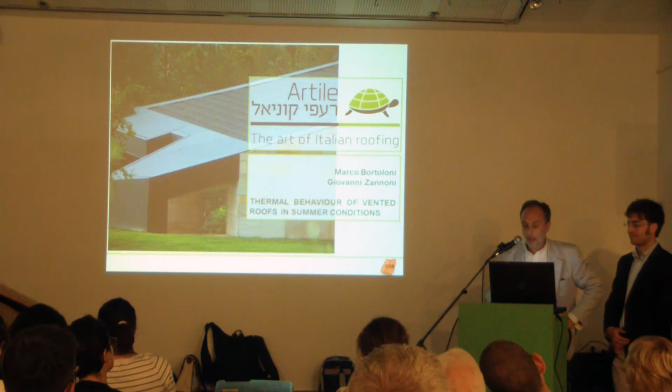As you have heard, the roof is something like an energetic barrier. It has to face several problems during the year: the problem of the cold in winter, the problem of the heat in summer, and managing the passage of vapor all year long. So it's one of the most important elements of the building envelope, and it must be designed in a very good way to get the best performance it can.

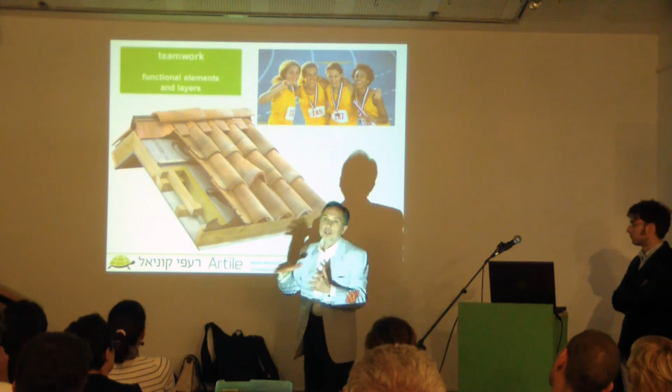As Dr. Gagari told you, the design of the entire roof is made up of several elements and layers, and you have to design them like a teamwork. They have to work together. You have to manage all the different layers and overlap every one, thinking exactly about what you need and what they have to do.

And you've seen in the last slide of Dr. Gagari the different problems that come out with the different components of the roof package. So it's something, I used to say, like a teamwork that must work together.

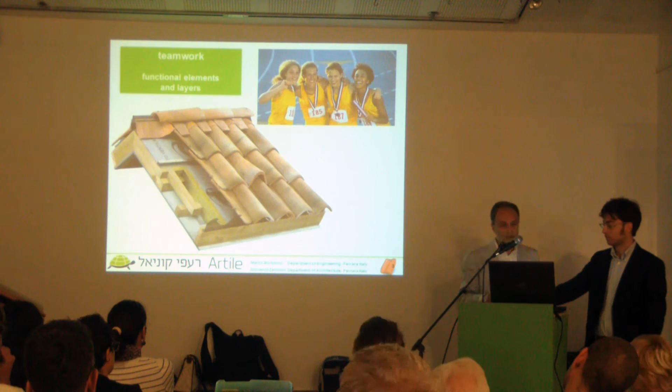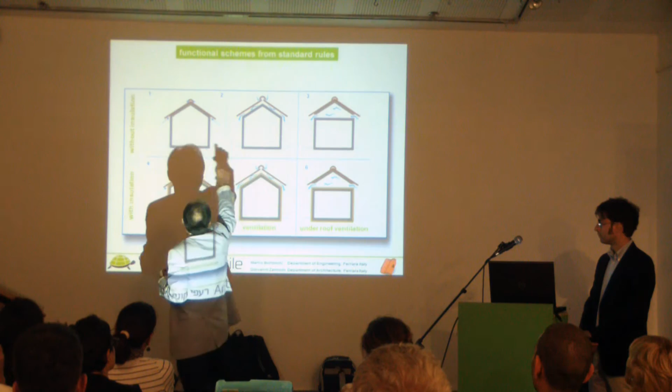From the sustainability point of view, the comfort point of view, the energy saving point of view, the Italian standard rule, I mean the European standard rule, because they are the same, planned 6 solutions, 6 functional schemes. The upper line without insulation, some solutions without insulation, and the lower 3 with insulation.

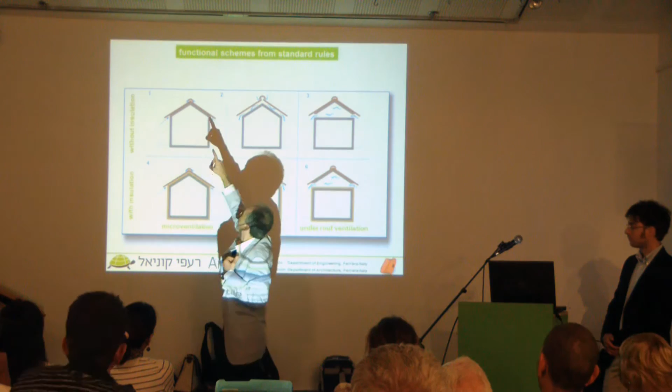But all 6 always have a ventilation layer that could be thin, around 3-4 centimeters, that we call micro ventilation. There could be more space, a larger ventilation layer to increase the movement of the air. In literature they call it above sheeting ventilation or full ventilation.

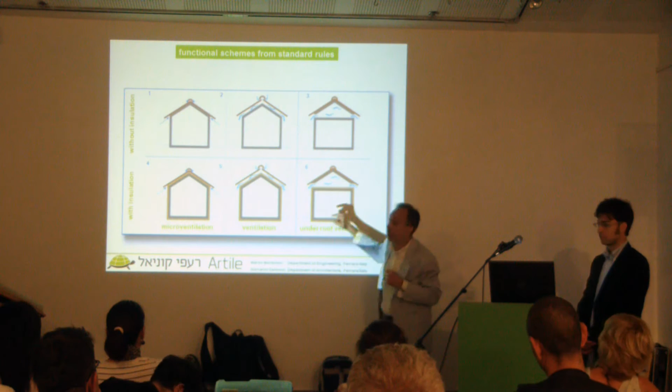And the third solution that you find in both lines is something like a ventilation space through the attic, the space under the roof. These are the 6 situations that you can find in the Italian standard, the European standard rule.

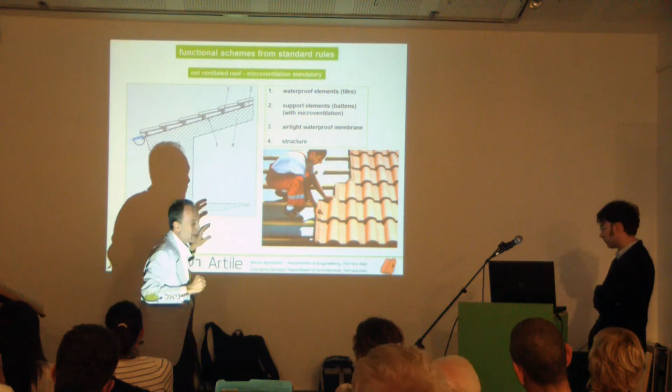And just to let you understand better, I can show this picture that also comes from the standard I was telling you about. This is the minimum required by the standard rule. That is a microventilation that comes out laying the tile over a single line of battens of 3-4 centimeters. And in the European standard, this is mandatory. You must always realize at least this situation because it solves a lot of problems.

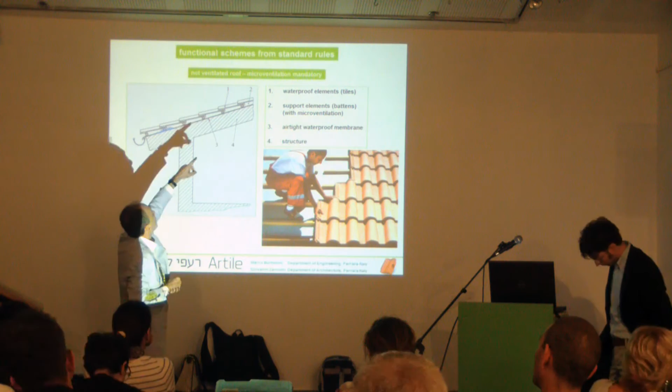And you see, you can have a structure, light or heavy, a massive concrete structure or a wooden structure, with the battens and tiles, and between the curved part of the tile and the battens, you realize an immaterial space, an immaterial function that is the microventilation I was telling you about.

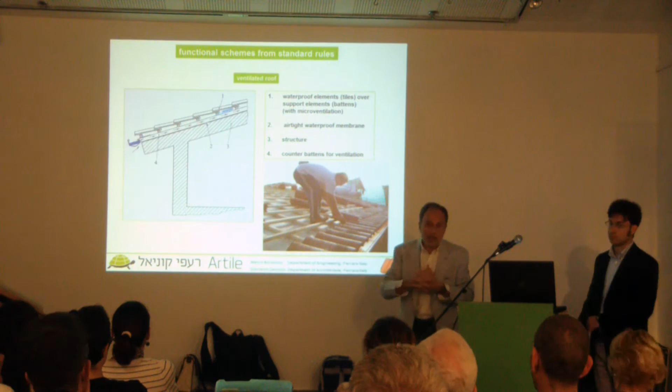To increase the performance of the movement of this air, you can use a double batten with a single line.

Oh, thank you, but I can use the shadow. Like a Chinese shadow. Something else?

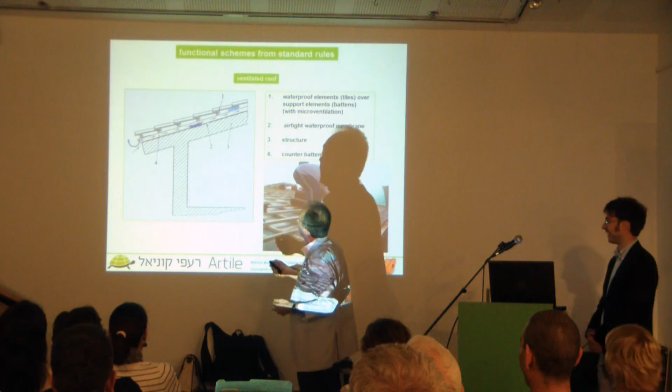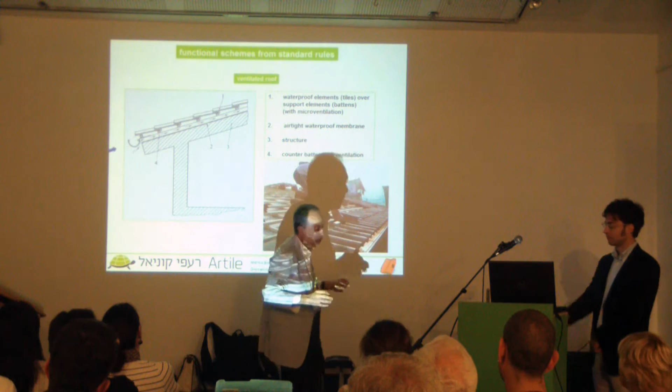Okay, a single line perpendicular to the gutter line to increase the space of the ventilation layer, and a secondary line parallel to the gutter line to support and engage the tiles. And this is what we used to call above sheathing ventilation, a very performant movement of the air in the roof. In a while, with my friend Marco, we will see how much it increases the performance of the roof, and how it helps to save energy.

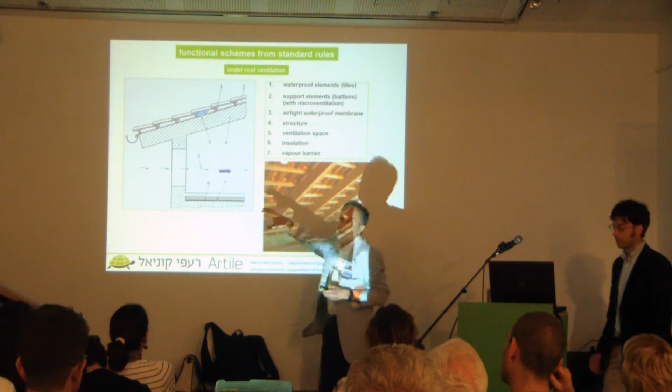The last type of movement of the air is this one that involves the entire volume under the roof. In this case, of course, this is an uninhabited space, just for storage or for insulation on the extrados of the concrete slab. And anyway, you must always realize the microventilation on the top of your roof.

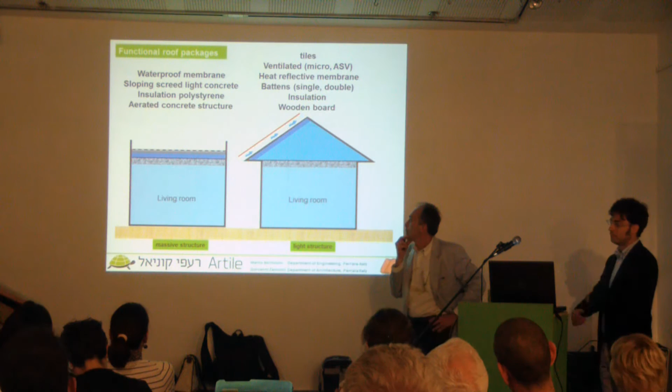In our research, we try to compare the performance of the classic functional flat roof with that of a pitched roof with microventilation and with ventilation on the top of the pitch.

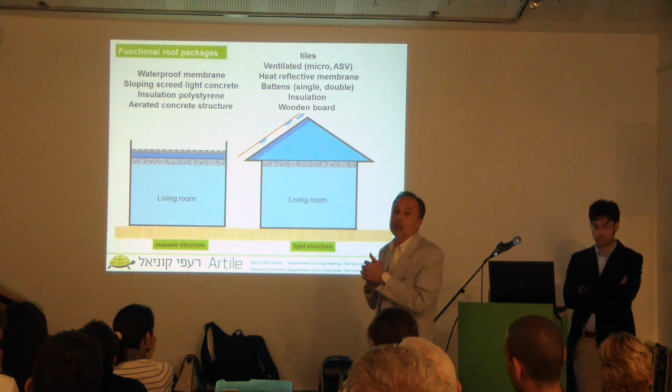We thought to build the flat roof with this package: an aerated autoclaved concrete structure, with an insulation of polystyrene, a sloping screed in lightweight concrete to realize a sloping surface to take the water to the gutter line, and a waterproof membrane, bitumen or PVC membrane, self-protected with gravel or with a coating surface.

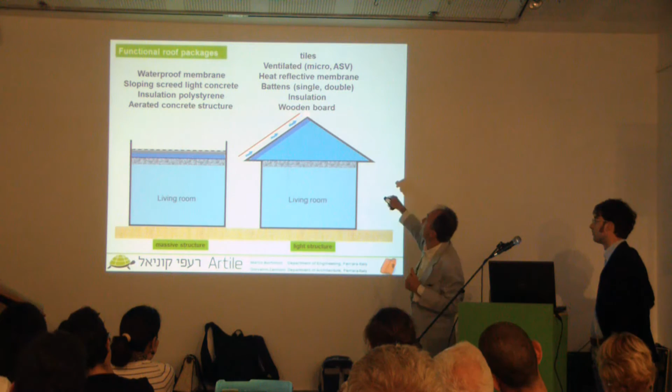On the other side, a similar building with pitched roof, with the light structure on the roof, the same slab of concrete that separates this space and the roof from the living room, built with wooden structure, a wooden board over the structure to realize a continuous surface, insulation, single or double layer of battens to have microventilation or full ventilation, a vapour-permeable membrane also as a secondary emergency waterproof layer, and the tiles.

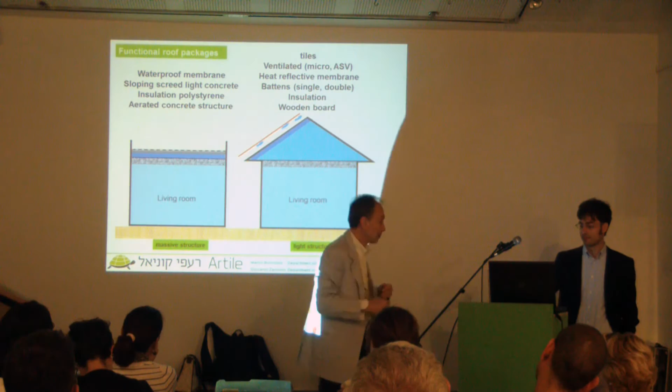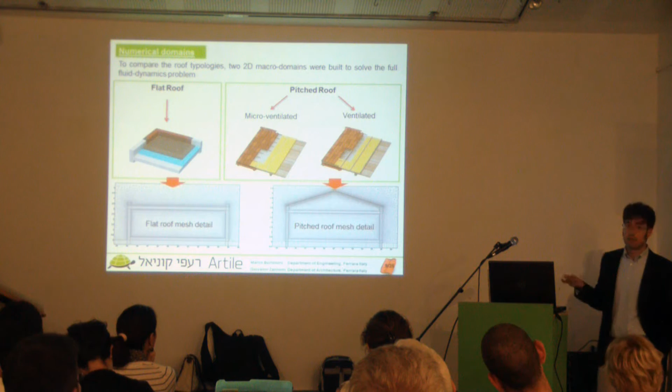As you know, assessing the energetic performance of a building and of a roof is a very difficult task, because the performance depends on some factors: external conditions, construction elements, and the domestic use of the building. As Giovanni said, to compare two roof typologies, we use a finite elements numerical model that solves at the same time the heat transfer problem and the fluid dynamics problem in unsteady state.

Our analysis is organized on two levels. The first one is a comparison between the flat roof and the pitched roof with a microventilation layer and with a full ventilated layer. The domain in the model does not include only the building structure, roof, floors, and walls, but also the environmental context, air and a little volume of ground below the building.

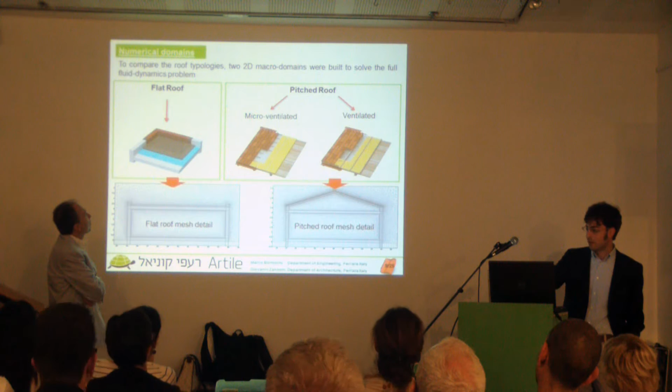In summertime, the overheating of the buildings is strictly linked to the external conditions: air temperature, wind speed, solar radiation. To reproduce the external conditions in the model, we set boundary conditions to define the external environment. We consider these series of air temperature, sun radiation, and wind speed. Air temperature and sun radiation are dependent on time. Wind speed doesn't depend on time, but it varies in accordance with the altitude.

All of these conditions are taken from the Israeli Meteorological Service, but consider that the air temperature that we use in the model is always 1 or 2 Celsius degrees higher than the temperature during the day in Israel. The purpose of our research was to compare the performance of the flat roof with the pitched roof in Israeli conditions.

I think that is very good for you, but you don't think like me. Very good things, but we come from a very cold winter in Italy, so we like the weather in Israel, but I know that it's very hot in summer.

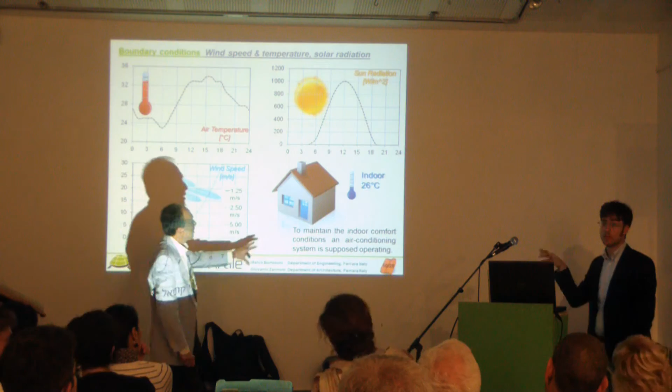Moreover, to consider the indoor comfort, we suppose an air conditioning system operating inside the building to maintain 26 degrees inside the living space. 26 degrees is the temperature that the Italian law imposes to maintain in summer. We can't go under this temperature; it's the lowest temperature we can have inside the house during the summer. We know that you prefer a lower temperature. They told us around 24 or 23.

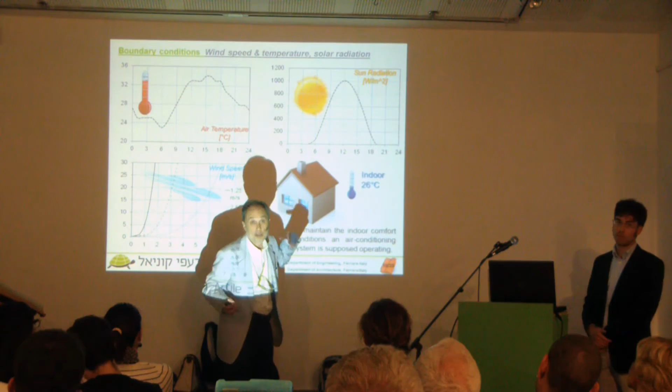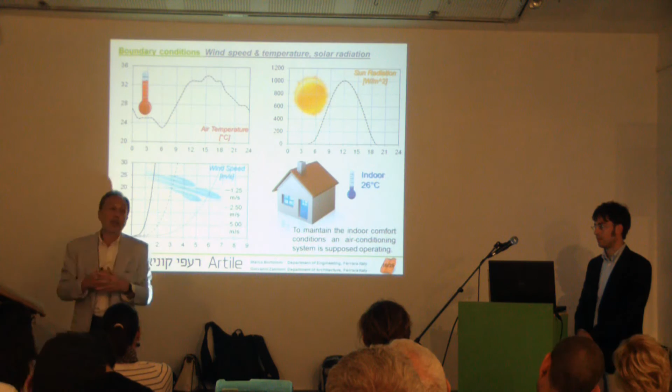Think that all the values we are giving you, with a lower temperature, will increase. So the difference between the performance of a flat roof and pitched roof will increase, the energy you need to maintain the same temperature inside the building will be more different, and the money saving will be different.

In detail, when we examine the ventilated pitched roof, we consider the variation of specific roof elements, varying the thickness of the above-sheathing ventilation, considering two thicknesses, 4 centimeters and a higher one, 8 centimeters. We consider also 3 levels of air permeability in the overlap between the tiles, from a null permeability, 0 millimeters, to 9 millimeters.

As you can see also in this model, the tiles are of course designed to realize a waterproof surface, but not an airtight surface. Between the overlap of the tiles, there is a little gap through which the air can pass. And this is very important for the ventilation, because it increases a lot the performance of the ventilation.

And we made other simulations considering the opening at the eaves section: null opening, half opening, and full opening. These factors are important because ventilation is provided by the permeability and by the eaves section.

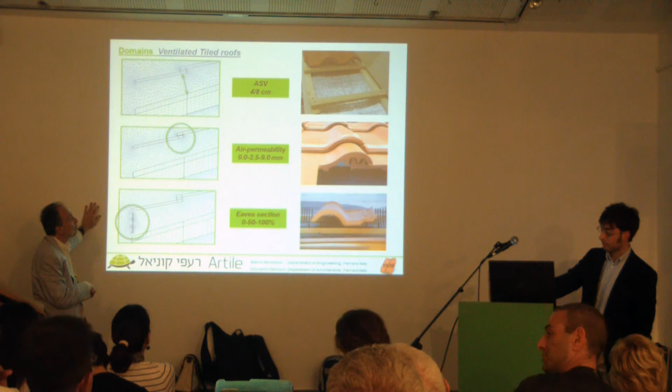In the summary of all the tests that we made, varying some factors, combining the three factors we showed before. These are all the points where we have taken the temperature inside the living space, in the under roof volume, and in the different points of the roof package, above all in the intrados and in the extrados of the ventilation chamber. These are all average values for temperature.

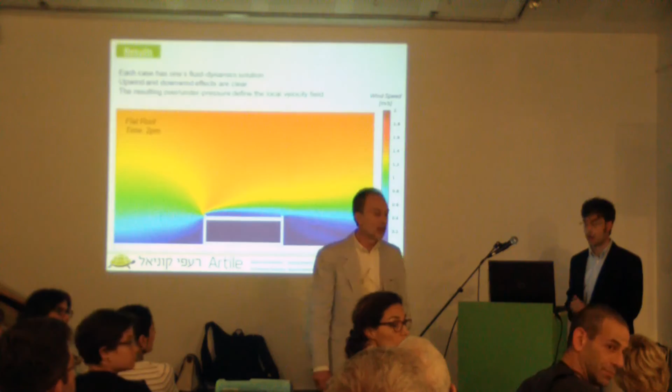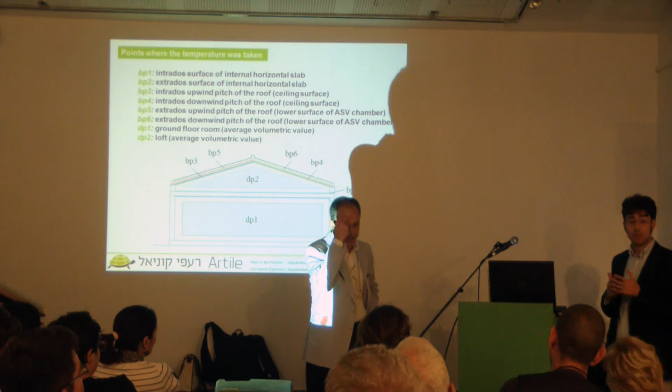Now we are going to show you some results. Was the research on a computer model, or was the research on checking the temperature? I don't understand. It was research on a computer model. Simulation. Yeah, just simulations. But we verified the accuracy of the model with some experimental tests, to verify if wind speed inside the chamber was correct, or if the temperature or heat fluxes were correct. The simulation is partially validated from a real scale experiment.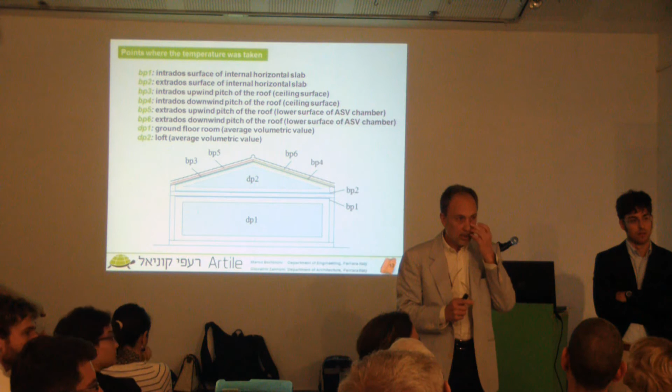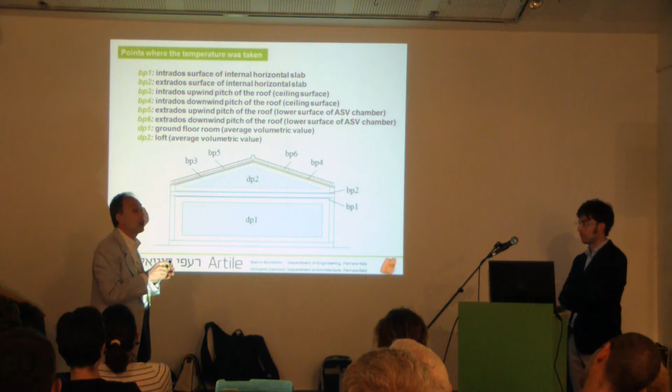Also, a question. In Israel, almost all tiles are Marseille tiles, used almost universally. Very seldom is the barrel tile used. Have you compared the performance of these two kinds of tiles? No, we usually work with these typical tiles, flat and curved ones. With the flat tiles, I think the results are a little lower because the air gap between them and the space that results from the side of the tile are lower. So this is with this kind of tile.

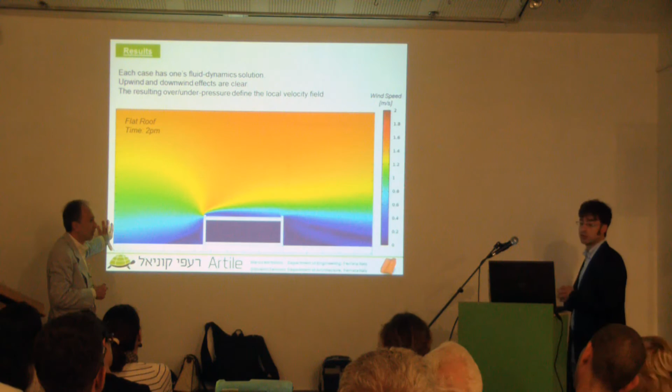Each case that we simulate has one fluid dynamic solution. This is at 2 p.m., the solution for the flat roof, and this is the fluid dynamics solution for the pitched roof. You can see how the wind hits the building from the left side, determining an overpressure on the left side, and consequently a depression on the right side.

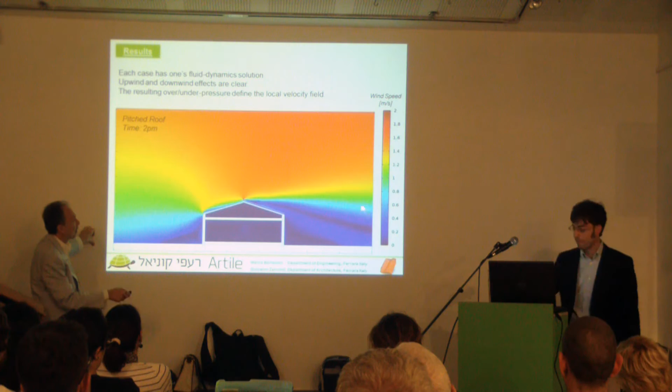Now we look at the temperature in the living space. Look at the blue line. The blue line is the daily temperature in the living space with a flat roof. It goes around 26 degrees with some variations. But what happens if you have a pitched roof with the under roof space and with microventilation? Look at the green line. You have always 2.5 degrees lower than the previous one. And if you transform the microventilation into a full ventilation layer, you go down another Celsius degree. It is the second blue line.

This performance depends on two factors. The first one is the ASV, above sheathing ventilation, that improves the performance of the pitched roof, increasing the comfort in the living space. But it also depends on the under roof volume of air that you have with a pitched roof, that smooths the thermal wave during the day.

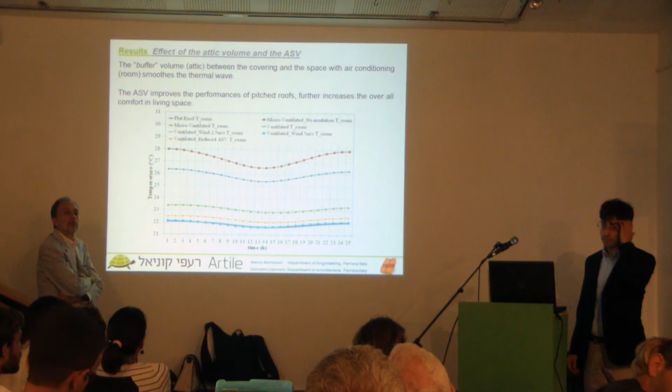I have a question. Can you say what is the pitch of the roof? What is the degree of the pitch? Around 20%. For the right side? Yes. In the picture, that was 20%? 30%. 30, okay.

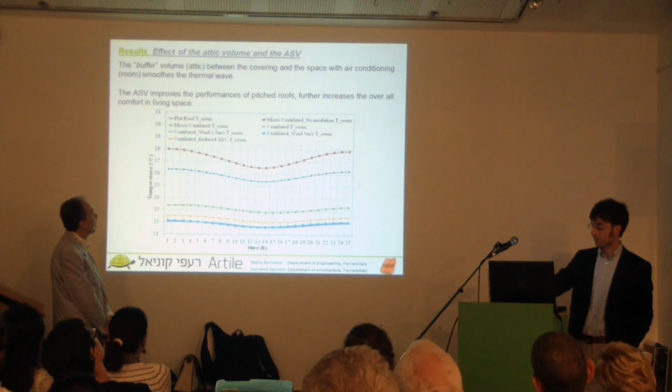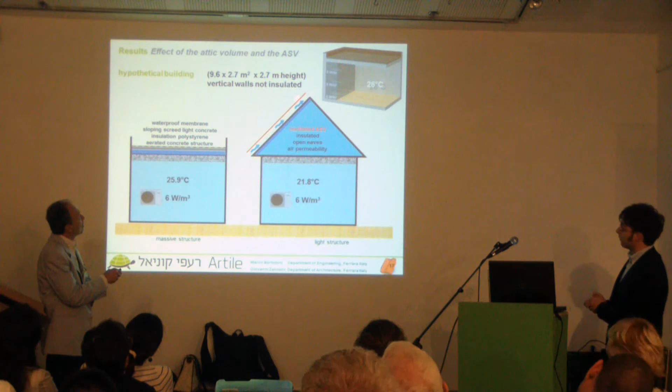All of these cases are simulated considering the same cooling power in the living space. So, to sum up, if you consider 6 watts per cubic meter cooling power to maintain this temperature, in the flat roof case you have 26 degrees on average. But if you have a microventilated pitched roof, in the living space you have only 23 degrees, 3 degrees lower than the flat roof. And if you improve your roof with a ventilation chamber, you have only 22 degrees inside your living space, with the same energy used for the chiller.

Now, in detail, we examine the impact on the ventilation efficiency of the factors that we have changed in all the simulations. I will remind you: the thickness of the ventilation chamber, the air permeability of the roof covering, and the opening at each section.

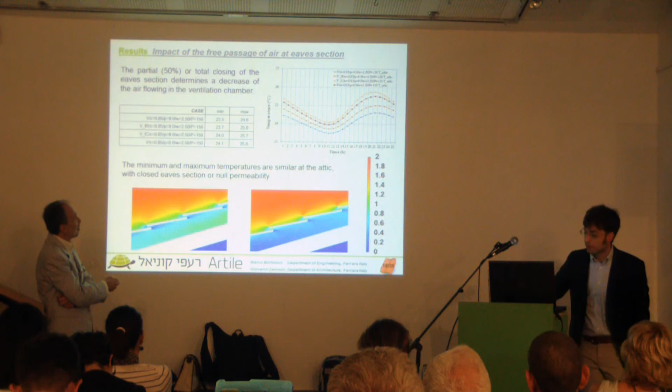But if you look at the variation with the air permeability, you can see that varying the opening of this section and varying the air permeability are very similar. But there is a difference between these two factors, because while

the inflow through the eaves section is strictly linked to the wind direction. If you have a wind perpendicular to the eaves section, you have a good air inflow through the eaves section. But if the wind has another direction, you could have some problems. While air permeability is on all the sides of the tile, and we can say that this effect is independent of the wind direction.

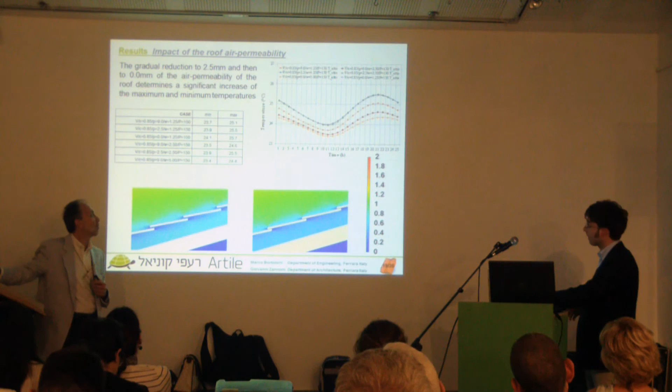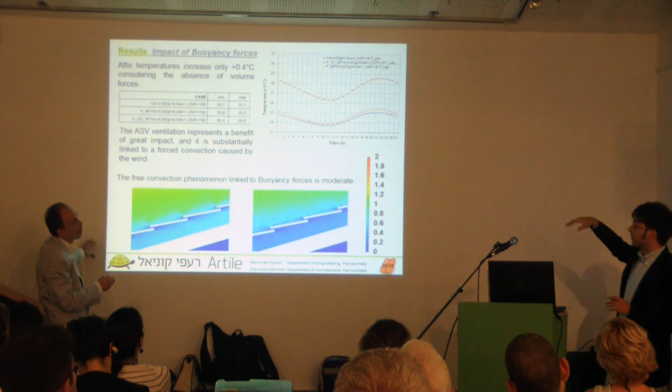Okay, to conclude, we analyzed the free convection phenomenon due to the buoyancy forces, but it's a very, very little effect. But it's important to say, and you can look at this graph, if you don't have ventilation or microventilation, the temperature goes high, very high, compared with a ventilated pitch roof. It's important to have ventilation.

Look at the power. We made a simulation to have the same comfort temperature in all of these roofs. And as you can see, you need a higher power in the flat roof case, but just if you have a microventilated roof, you need half the power. And if you consider a ventilated pitch roof, you save another 10% of power.

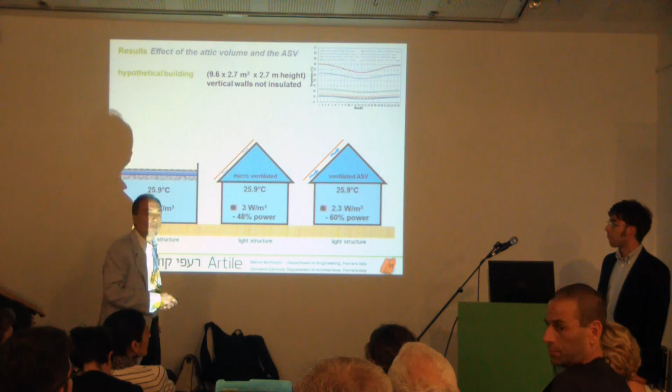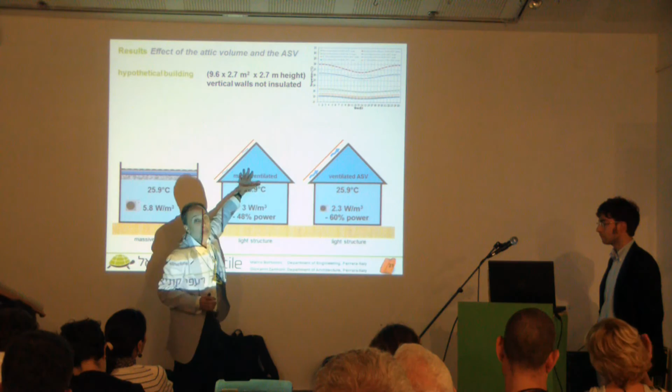Cooling power. Are you talking about the roof that has an attic or without an attic? If you have a pitch roof, you always have an attic. Right, but you don't have to have the cavity of an attic. It's usable or not usable. You have a sloping ceiling. Okay. Right. Without an attic, with a living space under. No, it's not a living space. This is just a volume. If you want to live under the roof, you have an additional space, but you have to condition it. We are just speaking about this space. So you are talking about an unfinished attic. We will compare the same space. Okay.

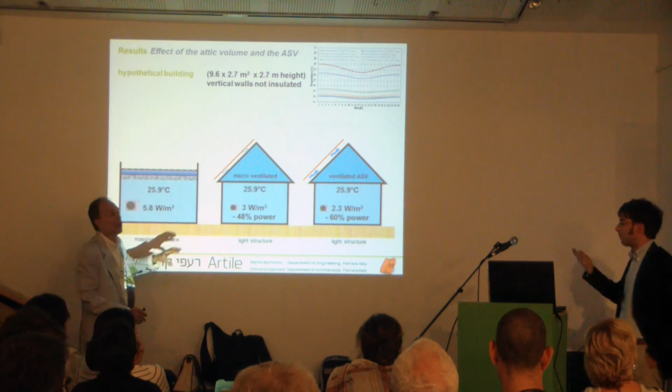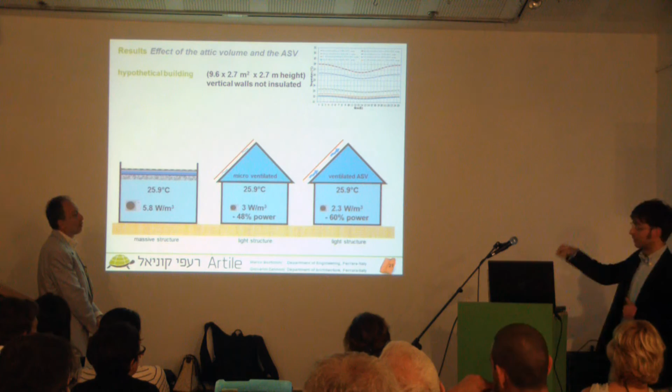But if you look at the temperature inside the under roof space, with the microventilated case, you can live inside the space. Always, as you understand, the temperature is higher. We can compare this one with this one. We have to try to compare the same space. But don't think of 35 degrees. You also have 27, 28 degrees with the same cooling power, if you compare with the flat roof case.

And at the end, we always arrive to speak of money, to make a balance. We simulated a house of 500 cubic meters, so around 150, 170 square meters, a cooling season of 6 months, since the summer is long enough, with a 14-hour day of chiller working.

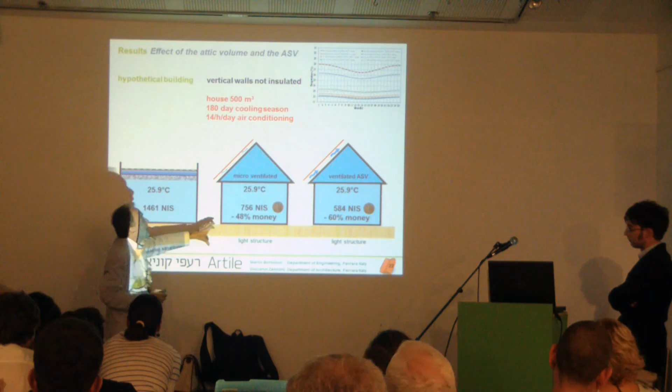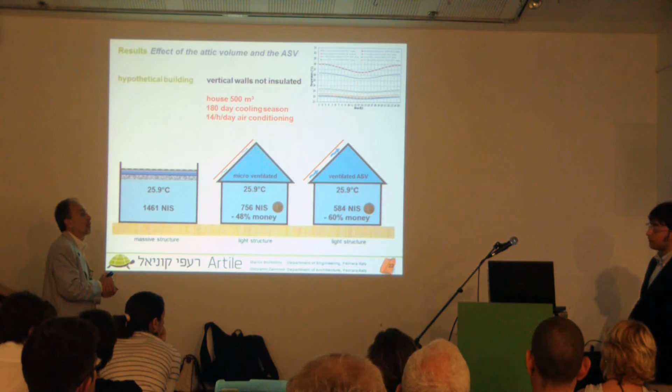And this is the cost that we found, around 1,500 shekel for the flat roof, and the money saving with the other solutions with microventilation and ventilation. We save around half of the cost of the flat roof, around 700-800, and around 600 with ventilation. We consider for the chiller a COP of 3, and we convert the electric kilowatt hour into thermal kilowatt hour, considering this COP. It's a good COP for a chiller.

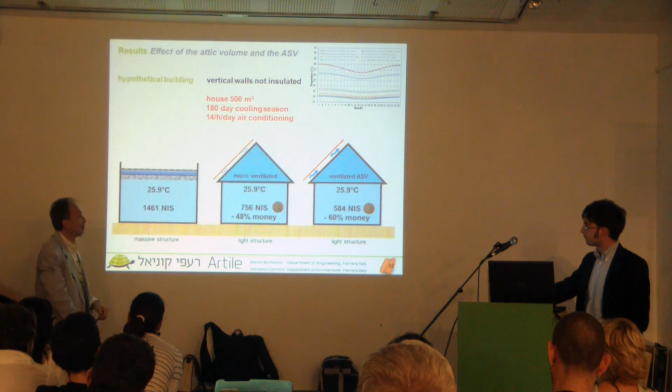And then if you need more power because you want to have a lower temperature inside, you use more energy and you can save more money. Yes, as I told you, if you want a lower temperature, this difference of cost increases. To sum up, the ventilated pitch roof displays in the living space a temperature lower than the flat roof one, and this depends on the insulating effect of the attic.

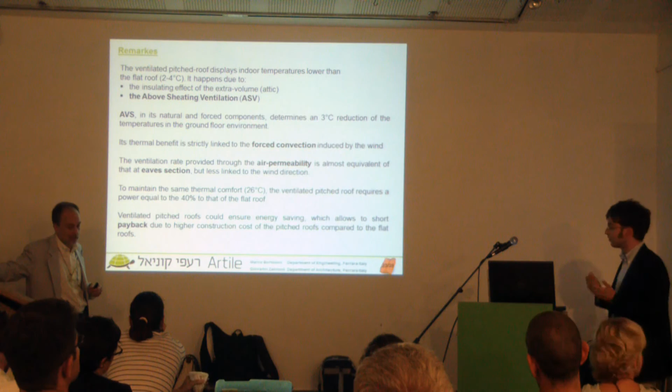Okay, I have to close, but this is summarizing the results we have told you. Lower temperature, energy and money saving of up to 40%. If you consider the energy saving, you have a short payback of the extra construction cost to build a pitch roof. That's all. Thank you. Thank you very much.

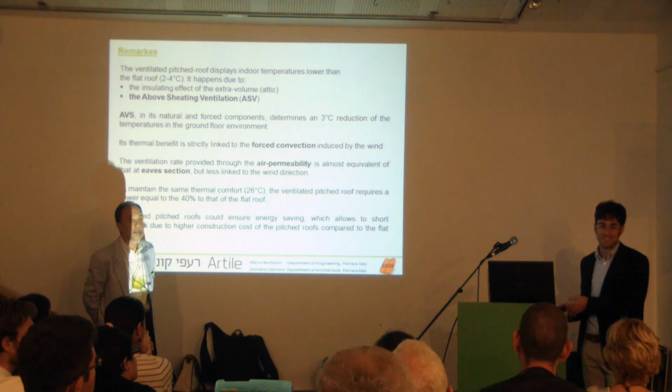Do you consider windows and direct radiation into these rooms, or is it just a closed room, two types of rooms? We didn't consider any window, because we focused on the roof. That's why it's so good. Yeah. But if you have some window, you need some power. No, but the temperature. I do a lot of simulations, and the temperature does not make sense for the Israeli summer. Okay. But you only have to increase your cooling power. Yeah. Okay. We made a comparison. Yes, we were focusing on the difference between the two typologies of the roof.

The R value of both the flat roof and the pitch roof was the same. The R value of the insulation performance was the same, similar.

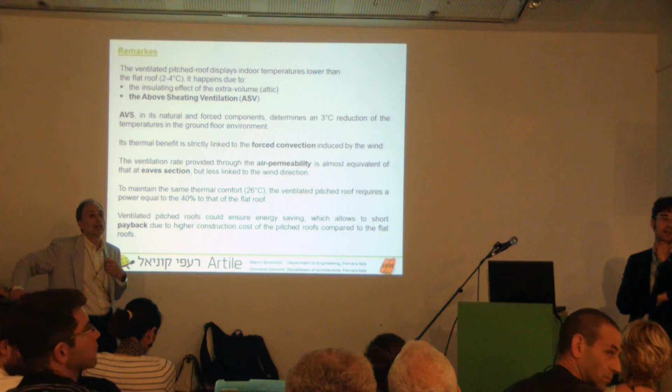Is it possible to put more insulation in the roof, and what will happen according to your simulation? If you increase your insulation, you have a lower temperature inside your living space.

Will it make the ventilated roof not needed? You always need insulation on your roof.

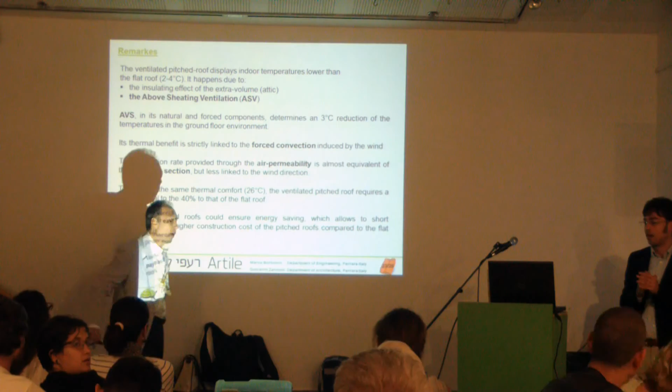No, sorry. We are speaking about ventilation, not instead of, but in addition to the insulation. Like in your car, you have the safety belts and ABS, and something else for your security.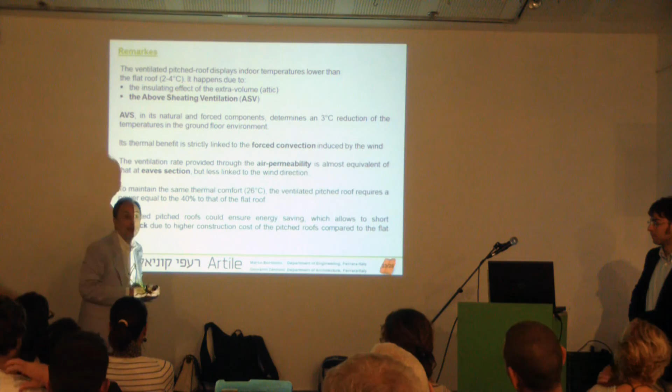Ventilation is a passive cooling system, immaterial, so it costs just the cost of the battens, because we have not yet taxes on air, not yet. So this is an additional solution.

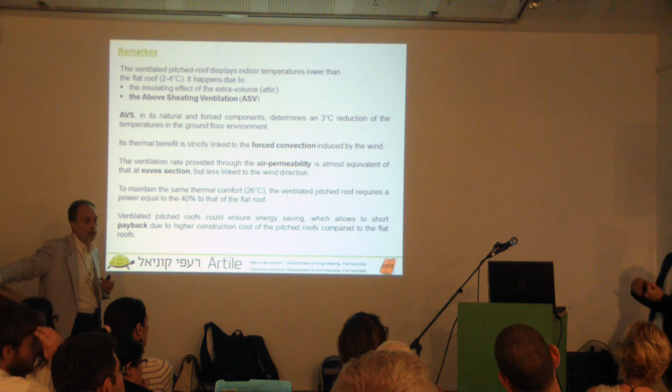There is another thing to say. In Europe, we use ventilation not only for summer condition, but also to solve the moisture problem inside the roof, and this is an important factor.

The moisture problem, there is no problem. I know you don't have it, but we have.

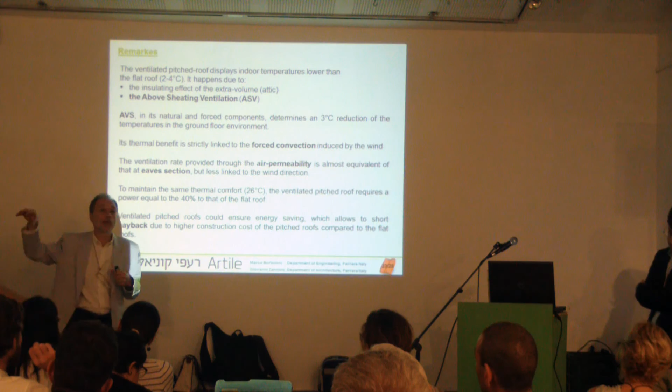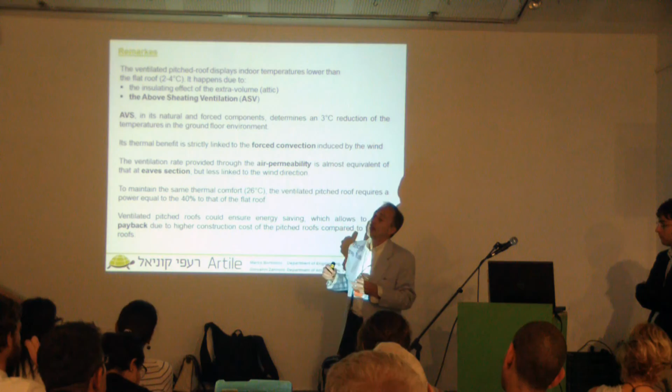There is snow that melts quicker at the upper side along the ridged roof, and to avoid the problem of the cracking of tile by ice, water inside becomes ice. So that's why the Italian standard says that the minimum microventilation is mandatory.

In winter, what happens when you have the ventilation? Cold winds go under the tunnel. Heat that passes through your insulation layer is heat that you have just lost.

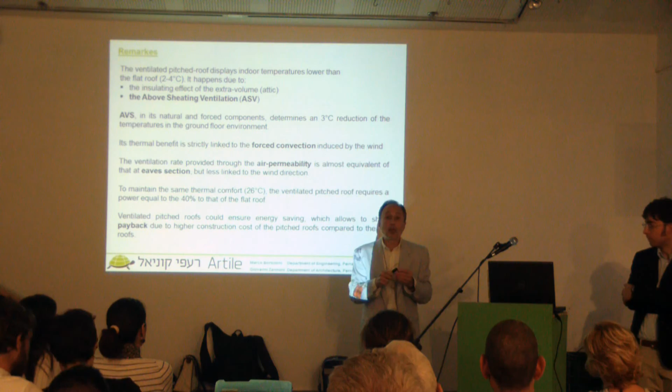I mean, the ventilation during the winter does not give you any performance, but it solves the problem of the moisture. No problem, not against, not in favor.

But in winter you have it. Anyway, in all Italy, in all Europe, we have pitched roofs that perfectly work also in winter.

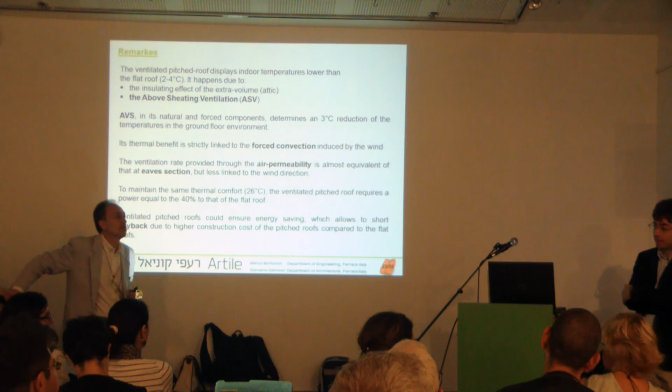Because in winter you have a strong problem with moisture, and if you want to have a long life roof, you have to solve this problem, and one way to solve it, the right way, is ventilation.

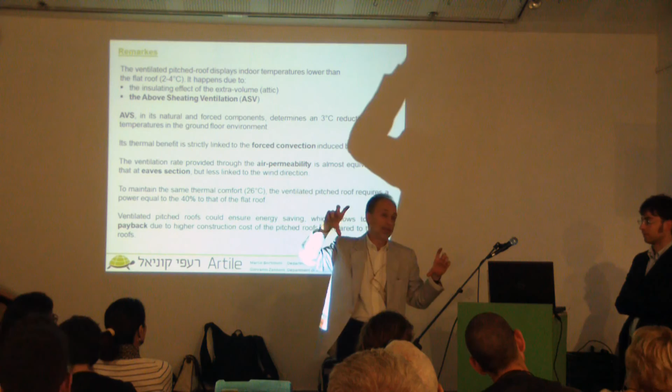Because you say in winter you avoid the escape of the heat just with the insulation layer. When your hot air escapes outside the insulation layer, if you have an airtight layer, or if you have the ventilation, I think there is no difference. You have lost the heat.

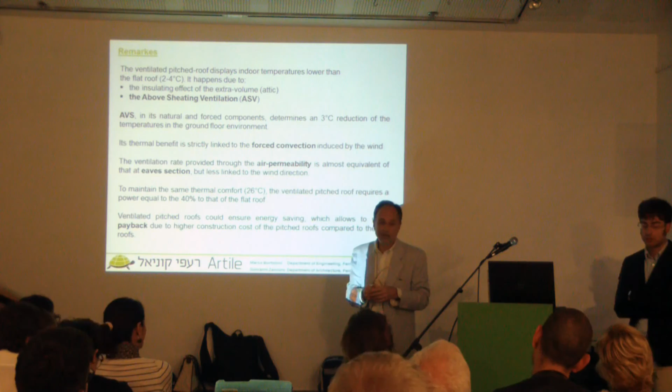Because you have to consider that the efficiency of the ventilated roof depends on the fact that the air that flows inside the chamber has a cooling effect in decreasing the tile's temperature, by convection in the under-tile surface. Understand? Where the tile radiates heat.

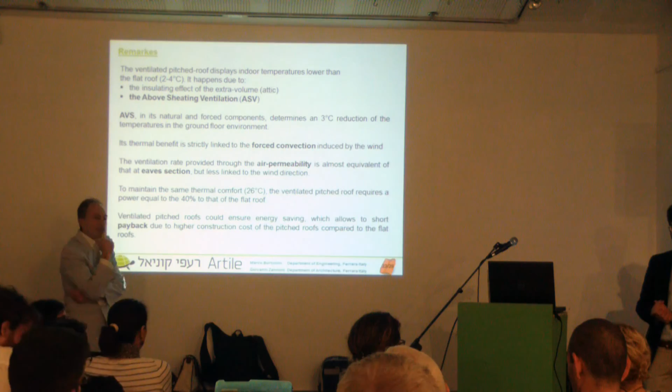You have heat coming out, even if you have a tight envelope. It's not as if the building is zero energy, it still radiates some heat. So you have heat coming out in the winter, and you have cold wind coming through the roof.

Then you are creating a situation where moisture gets trapped in between because of the difference of temperature. So what do you do with that? It can freeze in there and stay, and then when the temperature rises, it just goes away.

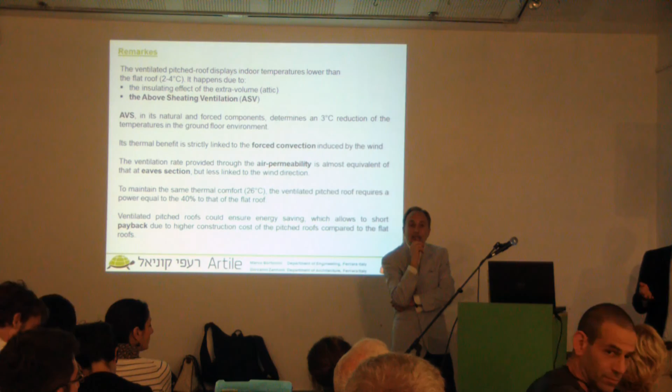Inside the roof or in the ventilation chamber, you have the same temperature that you have outside. And if you don't have a ventilation chamber, it's the same. It's not exactly the same temperature because you have a higher temperature. Yes, you do have a higher temperature.

It's better for moisture, no? Yes, it is. The moisture remains in a gas situation and is taken away by the ventilation, instead of freezing in the interstice of the cold tile.

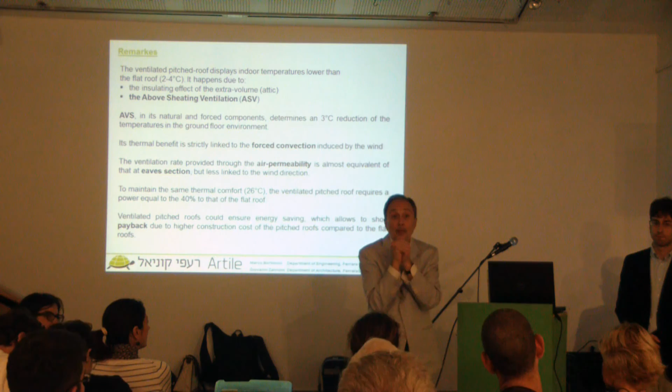Right, so it depends on also what the temperature is outside. But could you be in a situation where it can freeze in there and stay, or will you always be in a situation that it's above zero?

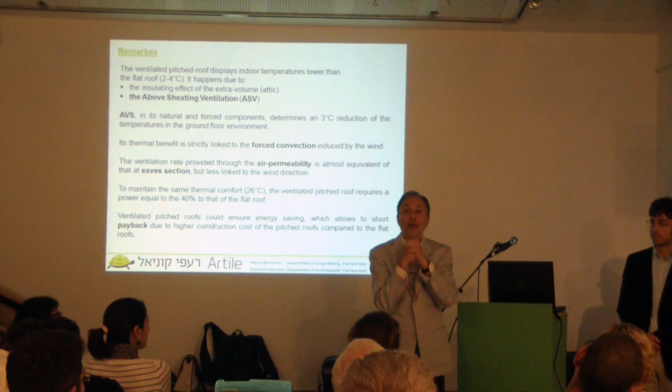Well, in our experience, I've never seen freezing moisture inside the tile, in the lower part of the tile interstice. I used to say that everything can happen, but I've never seen it.